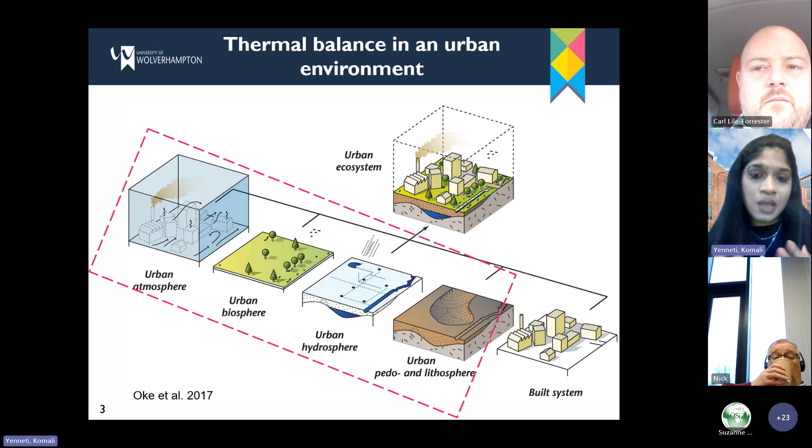In an ideal world, if humans did not exist, our urban environments would have ideally been part of four elements: the atmosphere, the biosphere (plants, trees, shrubs, grass), the hydrosphere (lakes, rivers, oceans, seas), and the lithosphere and pedosphere, which is our soils. On top of this sit the built environment and industry—our buildings, factories, and so on. So this forms our basic urban ecosystem.

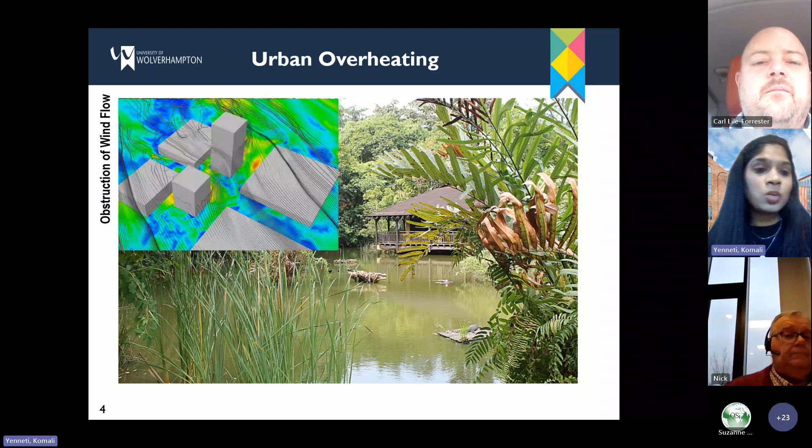Within this urban ecosystem, without us it would have looked like that, but on top of that we love our tall buildings, and we have fantastic new materials—glasses, concrete, tarmacs. We love our cars, and air cons. All these things we as human beings have introduced into the natural environment have been contributing to the increasing anthropogenic heat release.

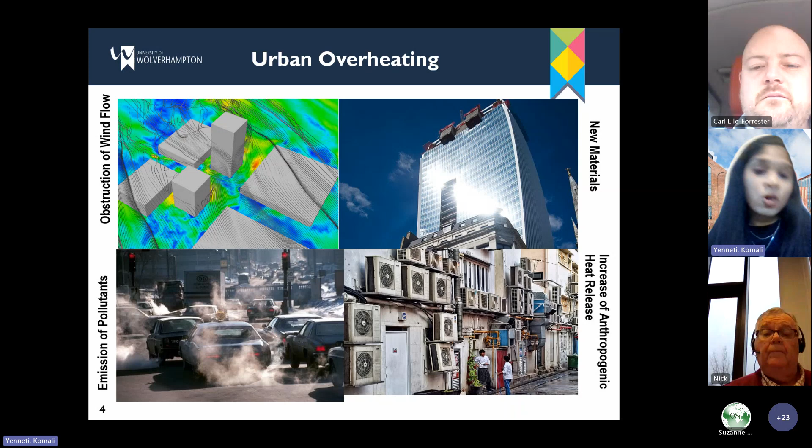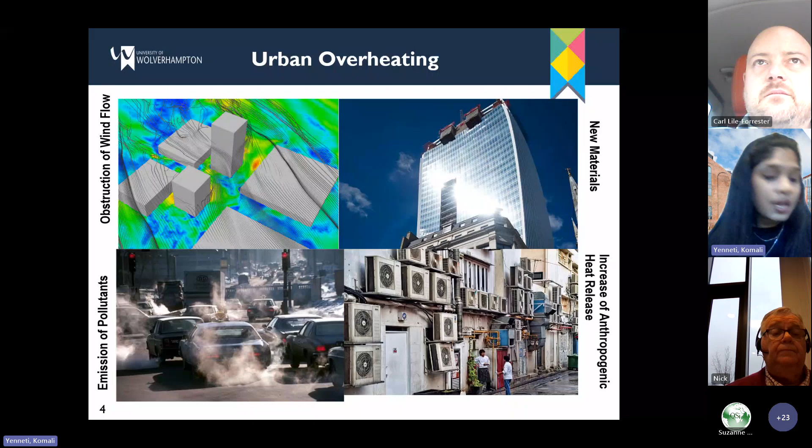It's a cyclic process: the hotter it gets, the more air cons we want, and outside you might notice the heat release from the air cons is terrible, which contributes again to more heat release—a cyclic process. Also, materials like tarmac reduce evaporative cooling and increase heat storage, while glass and other materials absorb a lot of solar radiation. All this contributes to overheating.

In the UK, especially the last couple of years, we've seen extreme summer temperatures. According to the climate change report we submit for net zero commitments every 5 years, the previous report projected the UK would reach about 40 degrees by 2030. Unfortunately, last year we already reached 40 degrees for the first time ever in UK history, so the projections are already being broken.

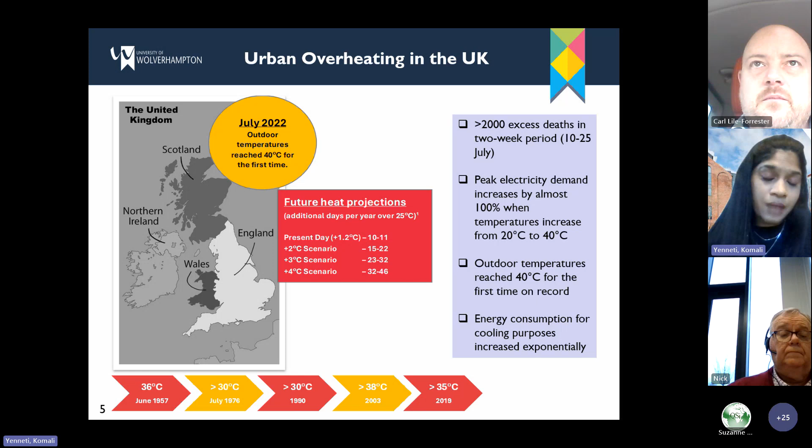Interestingly, cities are becoming more vulnerable to extreme temperatures. You might ask why specifically cities—because all the different things we do in the urban built environment contribute to overheating. But there's another phenomenon that's predominant and contributes to overheating: the urban heat island effect, or UHI as it's called. What is UHI?

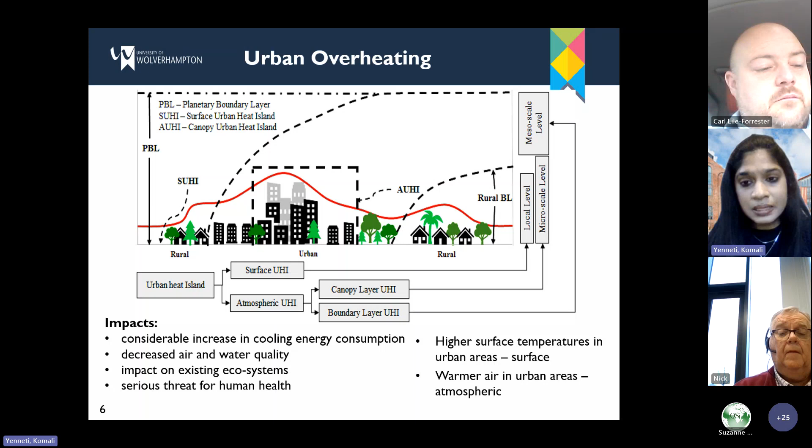It has significant impacts on energy, human health, our ecosystems, and decreased air and water quality. Interestingly, especially in summers, nighttime temperatures are generally warmer compared to early morning temperatures. This is because of the urban heat island effect, where cooling gets slower during the night, but in the early morning temperatures go down.

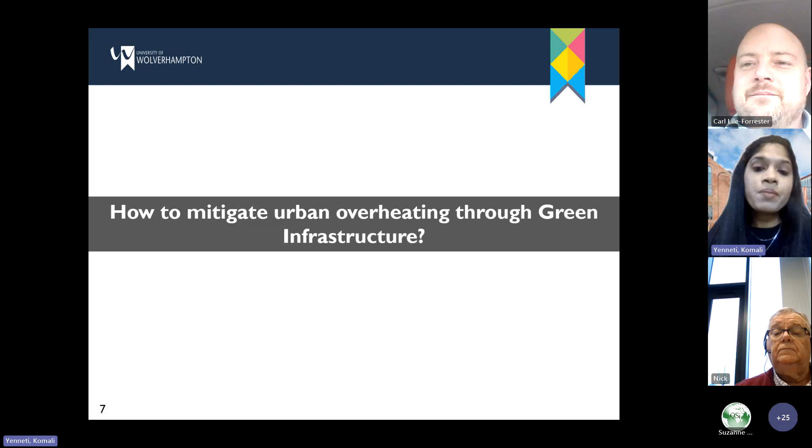But not everything is grey or dark. There is some green around the corner, and this is where green infrastructure comes into play. I'll go through this video, though I won't cover all of it since it's quite long.

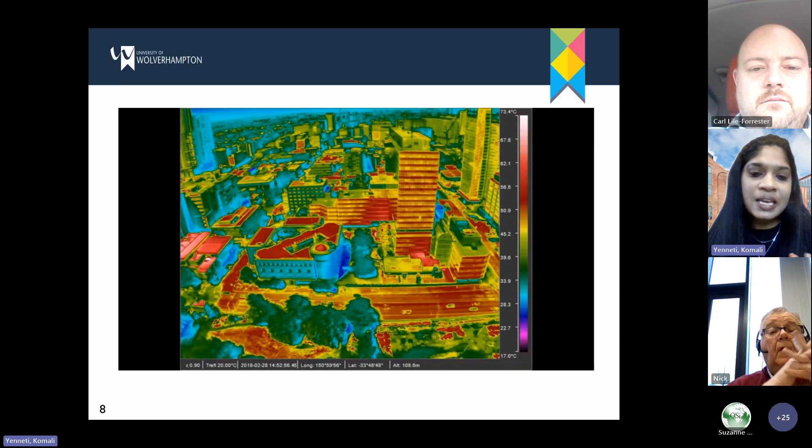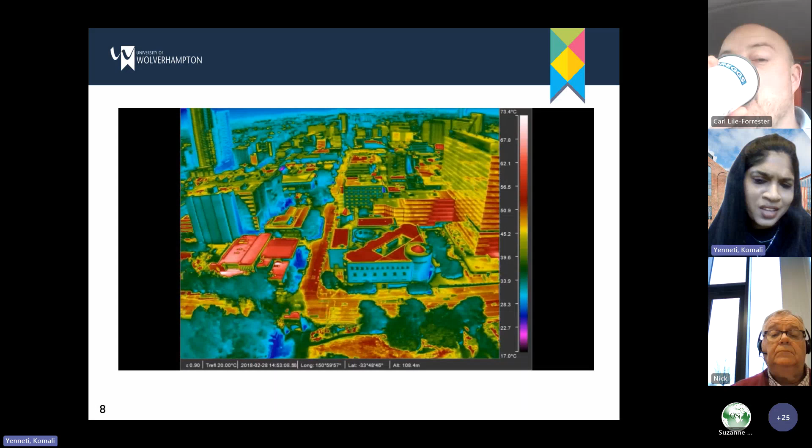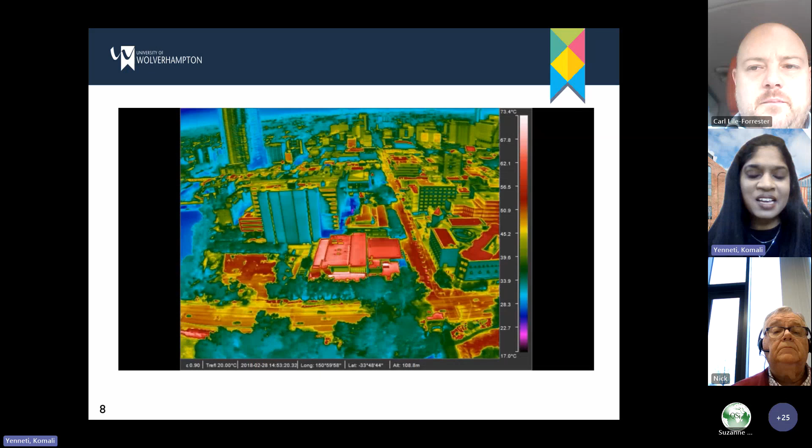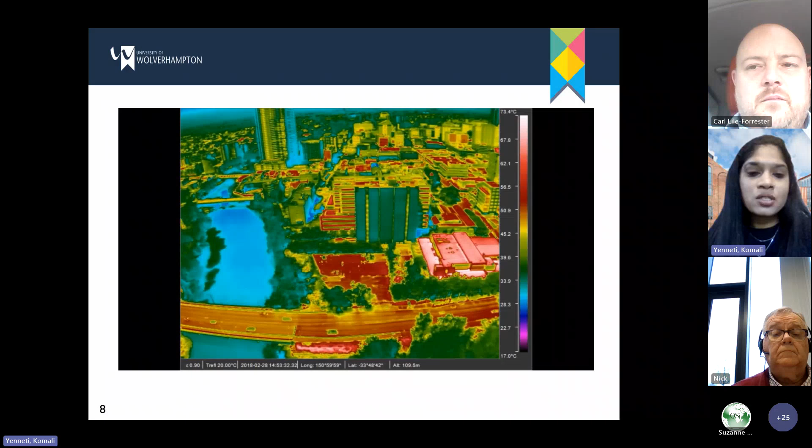This is Sydney. We did some research looking at urban heat island effects in Sydney. As you go through this, you may have noticed red, green, and blue areas. The red areas are hard surfaces like rooftops and roads. The green bits are trees, and the blue is the Parramatta River in the western part of Sydney.

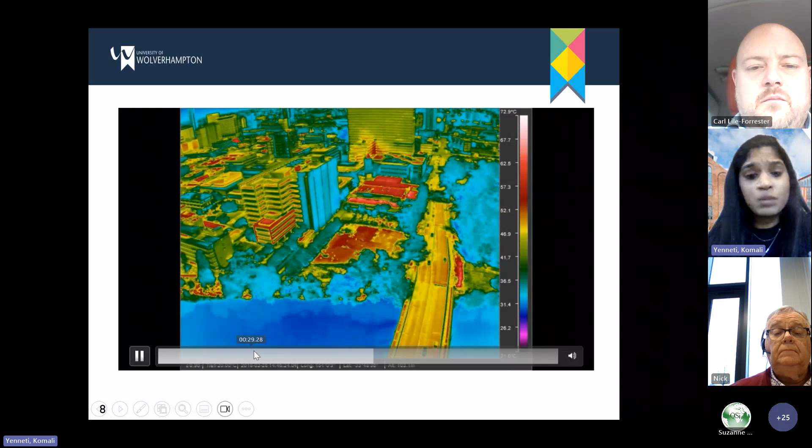This shows the temperatures. On the right is the thermal band. The red ones are almost over 50 degrees compared to the greener ones, which are less than 40, around 36. This is during extreme temperatures, like mid-January and February.

This shows that green infrastructure is potentially a solution. We already know plants and parks contribute to cooling effects within cities, but where there isn't enough possibility for parks and large spaces, other smaller elements of green infrastructure can play a significant role. For the next several slides, I'll go through what green infrastructure is and how its different elements can contribute to cooling areas.

Green infrastructure is a network of green spaces, which includes water and natural areas within urban areas. It's not just green infrastructure, but water is also a fundamental element. It uses natural processes to deliver multiple functions for a city, including reducing the risk of flooding, which has increasingly been an issue especially in the UK, and cooling higher urban temperatures.

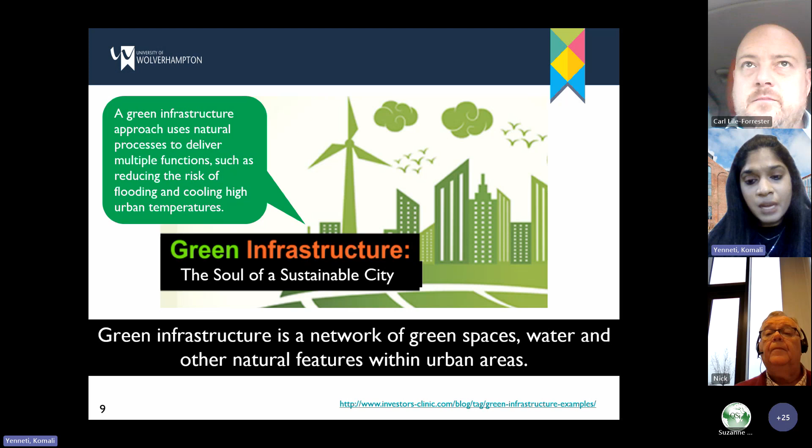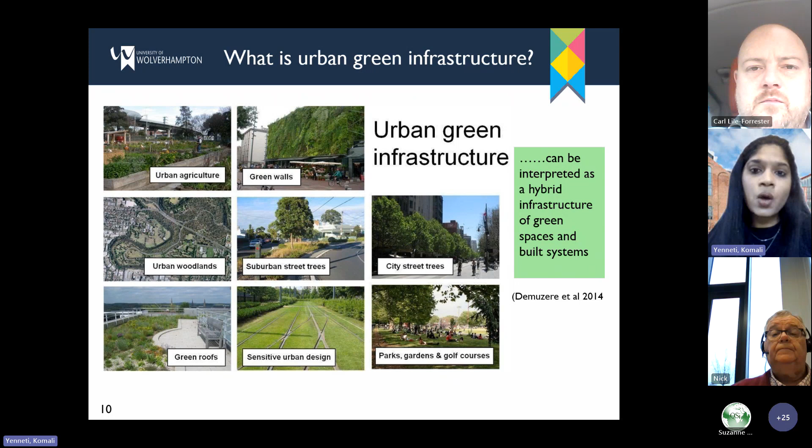At a more decentralized scale, it's about moving from grey infrastructure, like road bollards, to more street trees, from traditional roofs to greener living roofs, or more engineered solutions especially for floods. Two more examples are sustainable urban drainage systems, bioswales, which are basically green swales, and natural flood management systems. All these together become integrated urban green systems, sometimes called water sensitive urban design.

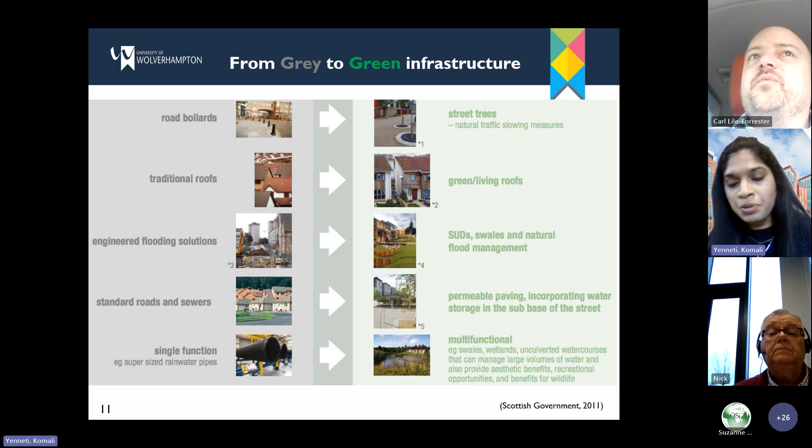In recent times, people are talking about moving from simple sustainable urban drainage to more water sensitive urban design or green urban designs - new terminologies that look at integrating all the different elements of green infrastructure, from basic street trees or parks to water management and flood management systems. These are all becoming multifunctional, not just contributing to one function like cooling or flood management, but also aesthetics, recreational opportunities, inclusive communities, and benefits for wildlife.

There is significant evidence, and the next few slides talk about this evidence in terms of contributing to cooling in cities along with multiple functions. For example, urban vegetation - interestingly, we think UK cities are very green, but not really. The canopy cover in many UK cities is less than 20%. For those from Wolverhampton, you might be surprised.

Increasing about 10% of tree canopy coverage will contribute about 15% surface temperature reduction, or 1.5 degrees urban heat island reduction. So in a simple way, just incorporating street trees or canopy cover will increase this.

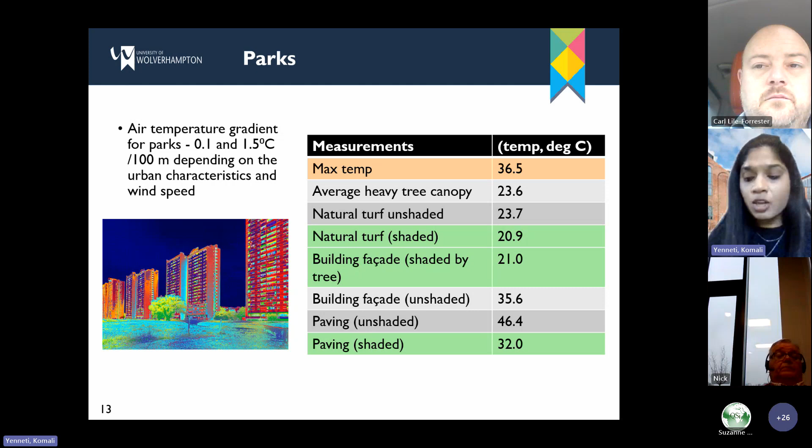This table on the right shows the green areas compared to the grey areas. For example, natural turf unshaded is about 23 degrees, whereas natural turf shaded reduces to 20 degrees. Similarly, paving unshaded is about 46 degrees, whereas paving shaded becomes 32 degrees surface temperature. So a significant contribution to cooling cities.

We've seen that cities are increasingly having less percentage of large green spaces or tree canopy cover in parks, which means we need alternative ways of greenery. One way is green roofs - basically vegetated roofs, installing simple greenery on top of roofs. Although it might be challenging for regular slanted roofs, it's more useful for flat roofs.

Some of our research shows that in cities like London, increasing 30% of the total roof area within the city can reduce the surface temperature by about 0.06 degrees. Although it might sound small at a global level, with net zero commitments aiming to bring warming under 2 degrees, that small temperature makes a significant difference.

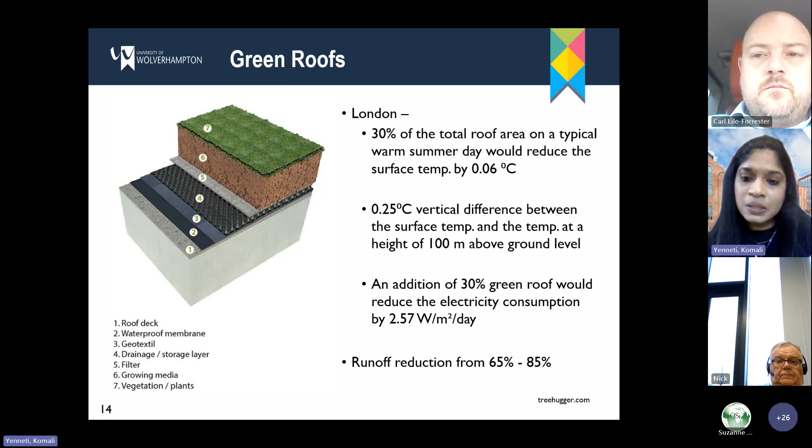Also, the vertical difference in temperature as you go up to 100 meters above ground level becomes about 0.25, meaning surface temperature increases as you go above ground level. So tall buildings, especially apartments and high rises, would benefit from green roofs.

There are three different types of green roofs: extensive, semi-intensive, and intensive. These depend on the percentage of greenery within them, and also across a gradient from low maintenance to very high maintenance. Extensive green roofs have low maintenance, while intensive ones require very high maintenance.

This includes well-maintained gardens, flat roofs, especially flat roofs with access. Semi-intensive roofs are more for higher demands. These different types of roofs are differentiated depending on building heights and plantations, ranging from small green roofs or shrubs to extensive or intensive lawns with more shrubs and trees.

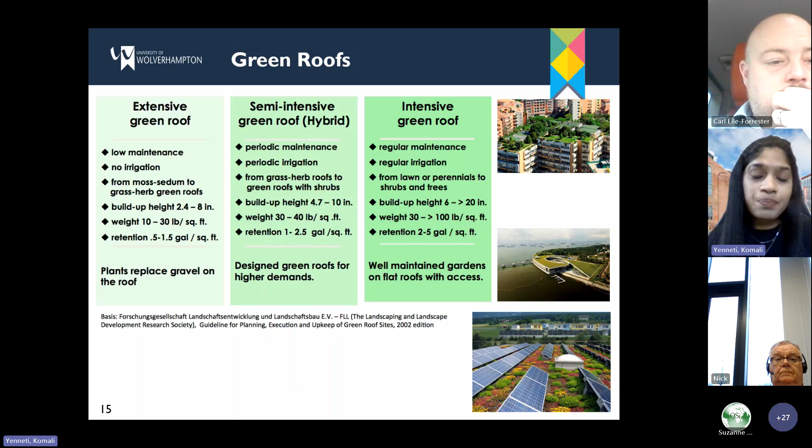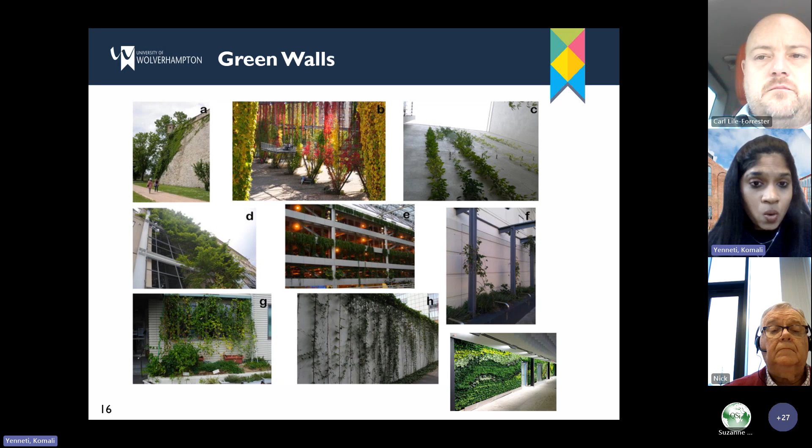Another type of green infrastructure becoming extremely popular in cities is green walls. We know of English ivy and other traditional simple climbers on walls, to more extensive human-managed green walls, called living walls. There are different types of green walls, as you can see here - I won't talk about all of them, but generally these are the main types.

These depend on the types - green facades are the traditional facades or continuous guides, for example. More recently, living walls, which are much more managed, are becoming popular. More recently still, we're looking at new technologies like hydroponic living walls.

This is what I was talking about previously - we were looking at a project integrating hydroponics into a green wall to monitor biodiversity, aesthetics, and public engagement in this space.

The evidence shows that green walls can contribute to a temperature reduction of up to 5 degrees in external surface temperatures, but also internal temperatures by 2 degrees. Evidence also shows that green walls can contribute to energy savings of at least up to 32% minimum.

Around the world, for those who have traveled extensively, you may have seen airports in countries like Singapore and other parts of the world resorting to this, especially where space is increasingly becoming a problem.

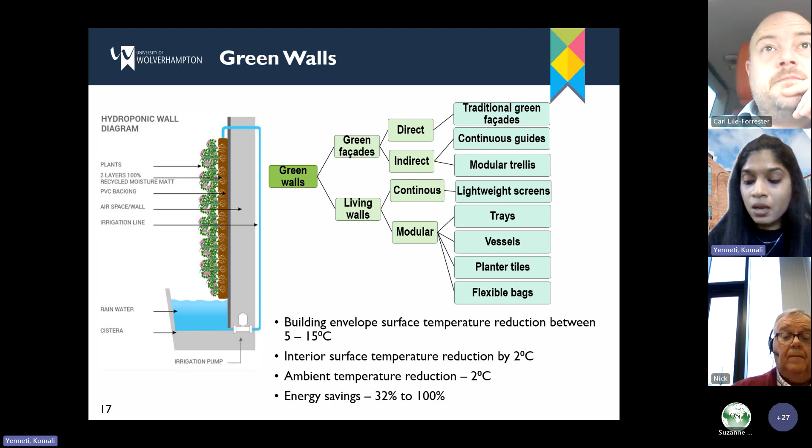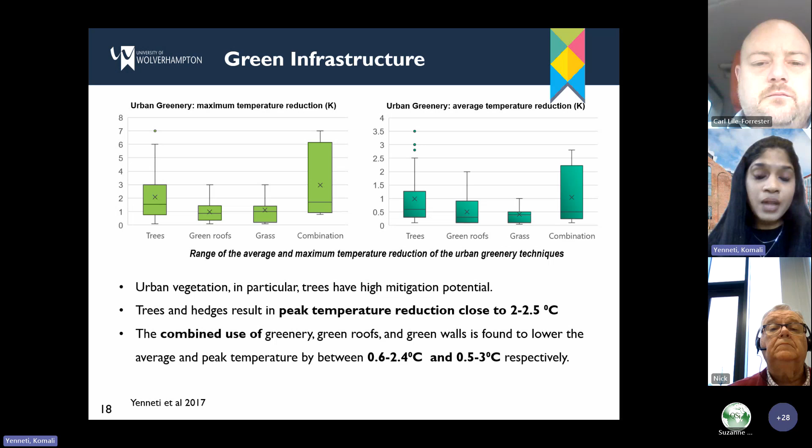As I said before, in recent times it is not just about... well, obviously green infrastructure doesn't stand alone. It sits with water, because a lot of this is integrated within water systems.

These sorts of green-blue infrastructure are especially useful in certain areas. Although it's important to remember, water increasingly contributes to humidity, so it isn't really useful in high-humidity regions. It's useful in hot and arid regions, like Suzanne was saying—we have some colleagues from the Middle East and generally hotter areas.

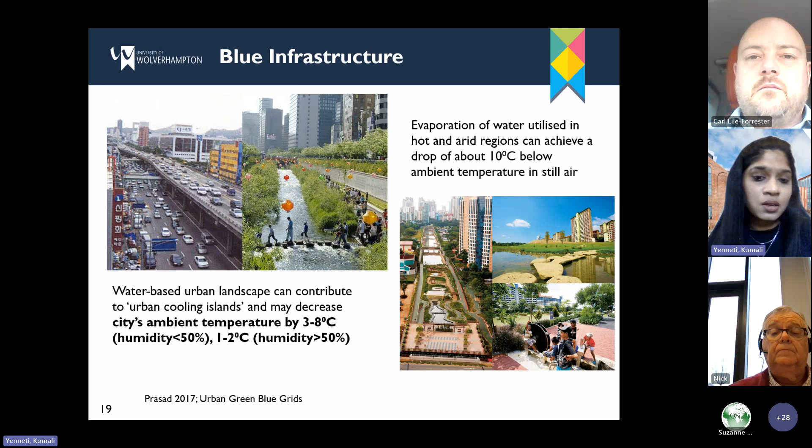Water-based landscapes can contribute to urban cooling islands, decreasing ambient temperature by up to 3 to 8 degrees, which is good especially when humidity is less than 50%. But as humidity increases, the cooling effect declines.

Where there is no possibility of natural water bodies, cities around the world are increasingly looking at alternative ways—smaller, decentralized water systems including water fountains, sprinklers, and water towers. Some of these examples you might have already seen in some cities. Even those from Wolverhampton might have seen this interesting sprinkler space in the city centre, which in summer really becomes busy with people around.

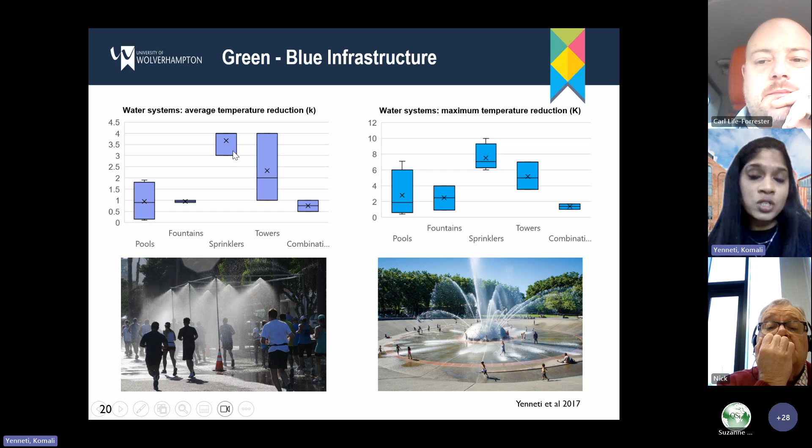We did find that these can contribute to really, really high temperature reduction. As you can see, sprinklers and water towers are becoming more common.

So from these smaller integrated things to much larger scale, we're looking at integrated or interconnected green networks—much larger than the previous examples, which were more at the building level.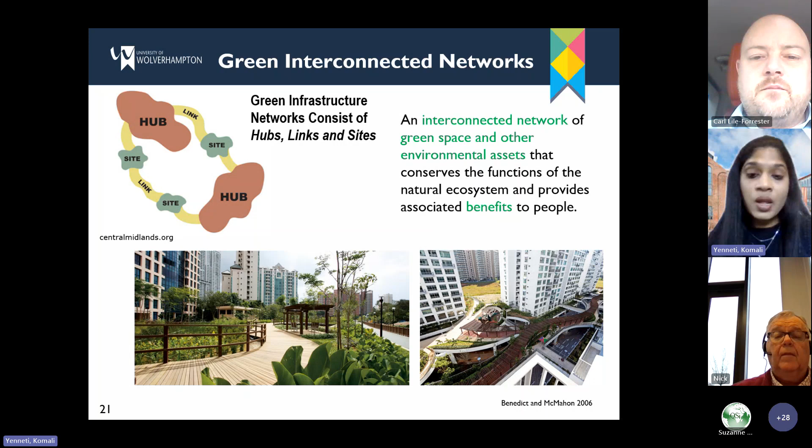For those who might have been to Singapore, these photographs are from there—connecting green space more widely with buildings. Singapore is such a small city that there's no possibility of having small parks, large parks, or street trees, so this is what is possible instead.

Not just Singapore—London, ten years ago, introduced a very interesting policy called the London Green Grid, about connecting different long-distance walks, green corridors, and open spaces. This is a continuous, evolving strategy.

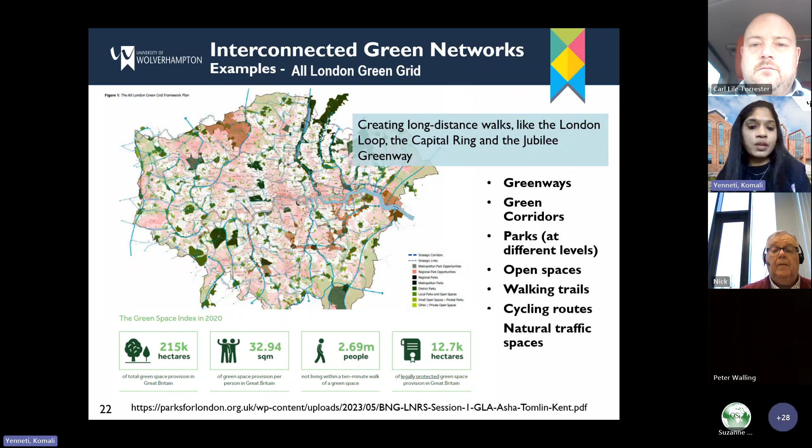Even today it's ongoing, and it has shown that increasingly more green spaces, open spaces, cycling routes, and natural traffic spaces are being connected to help people adopt these for walking. You've seen some examples like the London Loop, the Capital Ring, or the Jubilee Greenway. Other cities around the world are doing similar things.

Like Sydney—there's an app for the Sydney Green Grid, where if you enter from A to B, although it might show a longer route, it picks the best possible green spaces. So you might want to walk through greener spaces even if longer than a busy road. Such apps are becoming really popular and people do want to use them.

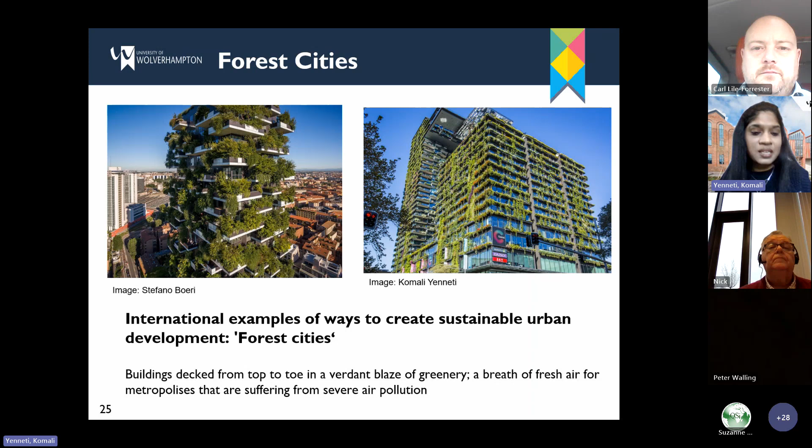Moving to bigger forest cities—these two pictures, one on the left from Milan and the other from Sydney. Forest cities are international examples like in China, of ways to create sustainable urban development, where you might see buildings decked from top to toe with greenery.

One important thing when we look at these green strategies or green infrastructure is that it's very important to look at the scale for implementation. The scale goes all the way from a simple building or neighborhood scale to a strategic scale. If we neglect the scale, the effect could really cause an erroneous characterization of the whole city or even the region.

Strategies suitable at a certain scale may not be useful at another scale. It's about picking up from a small neighborhood, maybe a simple garden or backyard garden, to a small green roof at a building level, all the way to strategic level, like the London Green Grid, where we're looking at strategic corridors, trails, nature trails, or cross boundary networks. So scale becomes really important.

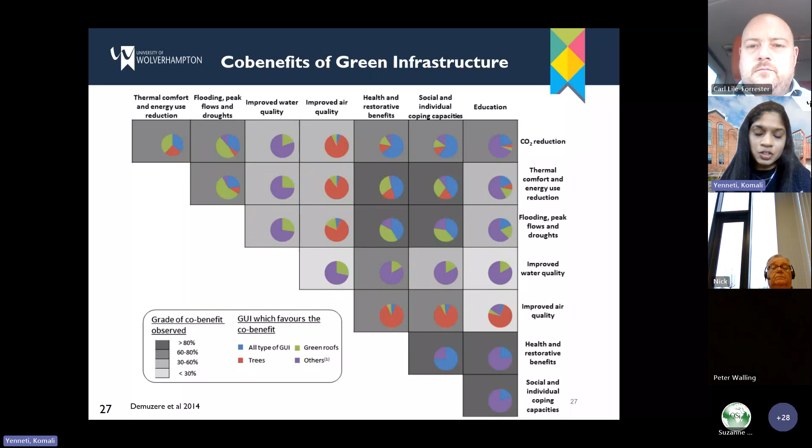So it's really multiple co-benefits, and this graphic shows how these multiple green infrastructures can contribute to multiple co-benefits. The grade of co-benefit observed, the darker the color, the darker gray, is over 80% of that specific benefit. For example, the blue ones, all the different types of green infrastructure, apart from the regular green roofs and others, would contribute to the health and restorative benefit and the social and individual coping capacities.

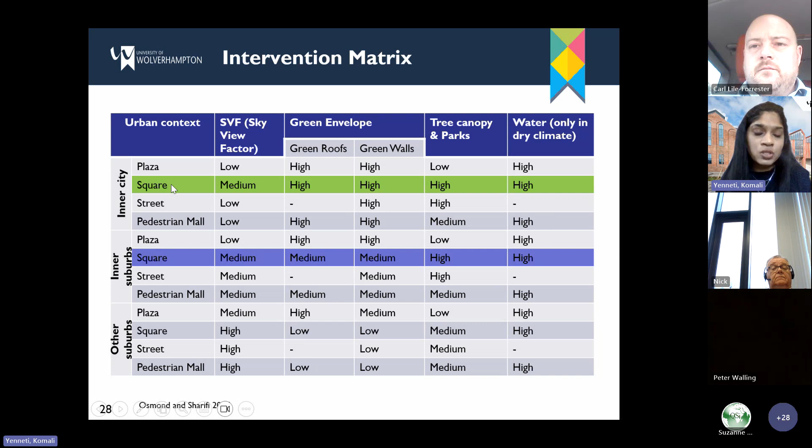The most important is at the square level or the neighborhood scale, where some of these strategies can be really, really useful. We did a lot of research on this, and I'll just pick up one example of a project we did in terms of planning alternatives.

This is an example of a project we did with Sydney, working with the City of Sydney, looking at developing a tool with multiple green infrastructure. What happens is, when a builder or developer submits a planning permission, it goes through this tool, and then it shows what the impact is at the neighborhood scale, in terms of the urban heat island or overheating.

On the right, as you can see, the planning alternatives show up, okay, this is what it's going to be. 10% of green space or 20% of green space is going to have this much impact on overheating or cooling. So you need to revise your percentage of green space within your building or the planning application. That has been really useful, and it's under implementation.

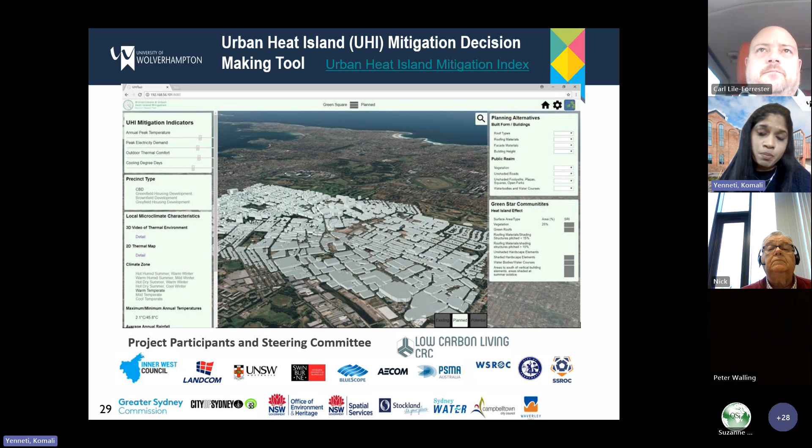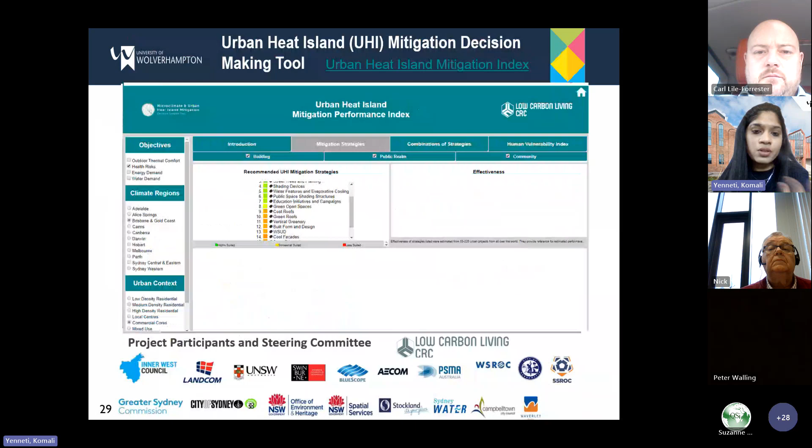So there are many more projects, similar kinds of work that we did in the past, and examples like that. I'll be happy to answer any of those questions if you're interested, and we did a lot of work on those. Generally, there's a large amount of work in terms of some of the stuff that I talked about, and I'll be happy to talk through any of those examples. Thank you very much, everyone.